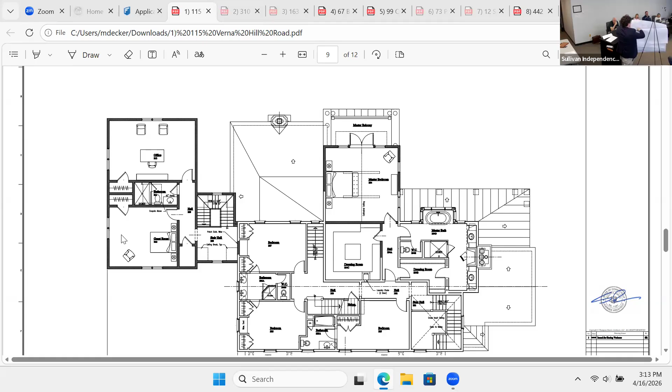So that's the addition there. You're looking at the side addition, or side of the addition right here.

So again, just maintain the character of what's there existing, but just extending to a second bay.

Next, I'll just show you again aerials of the surrounding neighborhood. This is the GIS map. There's 115 Verna Hill Road. And one of the things I tried to point out, and that you could see if you look at the aerial map, is that non-conforming side setbacks are a norm.

That same neighbor at 63 Verna Hill Road that I was talking about, they're only 6 feet from their side property line setback. One important thing, because of that, even after the addition, these neighboring dwellings, 63 Verna Hill Road and my client's dwelling, will still be about 125 feet apart.

So because that's skewed way over to this side, it's well in excess of the side setback standards. The regulations intend for dwellings like that to at least be 60 feet away from each other, 30 feet on one side, 30 feet on the other. This will be more than double that.

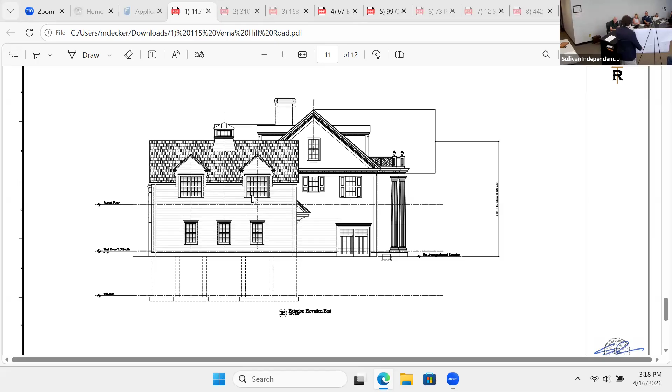So I think I know the answer, but I'm looking at the zoning compliance summary in the survey, and it says the minimum lot frontage is 596 feet along Greenfield Hill Road. But that's not material to the application—it should be 185 feet. And why is it? It's just a simple mistake, but why is it there?

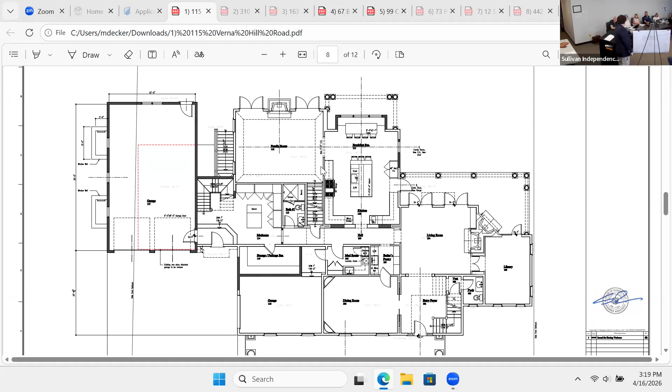Well, I think he's right to put Greenfield Hill Road and put that frontage in there. Let's talk about 596. But you don't have 180—there's nowhere you have 185, which is the issue. It's your hardship and it's why you're here, and it's not anywhere in the summary of dimensions.

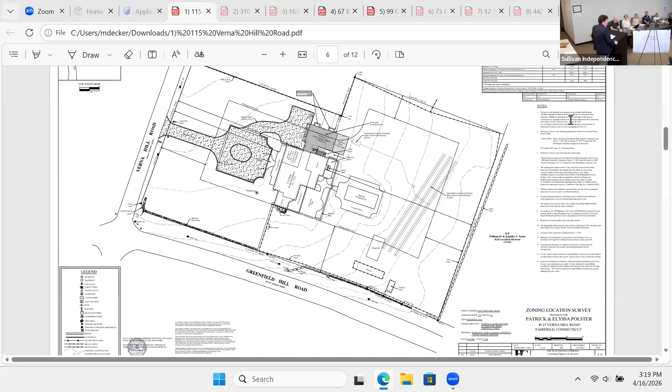Well, I still think he would be required to put that in for the zoning data table, just to show what the total frontage is. And that's why I'm calling it out—specifically because it gets its frontage on Greenfield Hill Road, but the house isn't even oriented that way. It's oriented this way, like it was a regular lot fronting on Verna Hill Road. Right, and that's what the house frontage is on—Verna Hill—and that's 185. It's just very confusing.

Yeah, he could have put an asterisk on it or something, maybe, and put that on there just to show the distinction. Can I speak to that? No, not yet. More questions from the board?

Yes, Mr. Decker, is it typical on a corner lot to just arbitrarily pick the long side to show compliance? What they're showing here is for lot frontage, yes, on a corner lot.

But what they sometimes do—and I was just checking—is have an asterisk down at the bottom to indicate the second street line is X, to identify that, in which case that's more glaring if you had an asterisk there. But by the same token, just looking at the survey, you can see the number is identified on there as being 185. Showing that one of the lines is compliant is uniform through most of what surveyors will put on.

So if it is uniform and compliant, the secondary—well, I was going to say the fact that the secondary street is not compliant with the 200. It's my sense that looking at a grid like this, we should see what the application is about, and we don't see it on here. It's just, take it with you next time.

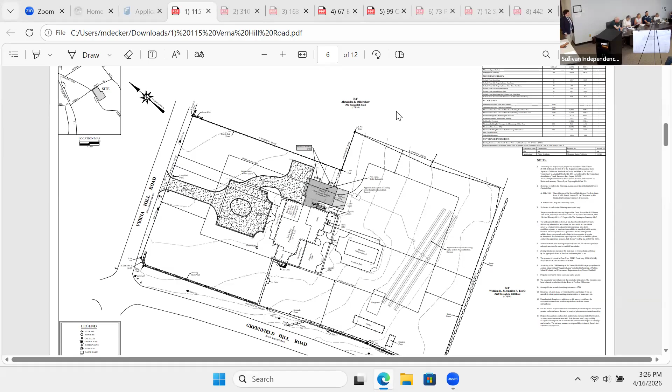All right, so no more questions from the board? Okay, I think I'm good. Okay, thank you very much. Is there anyone in here or online who'd like to speak for this application? No? Is there anyone in here or online who'd like to speak in opposition to this application? No? Okay, we're going to close this application. Thank you.

Okay, I'm going to go on to item number 2, which is 310 Duck Farm Road, map 147, parcel 327. Petition of Angela.

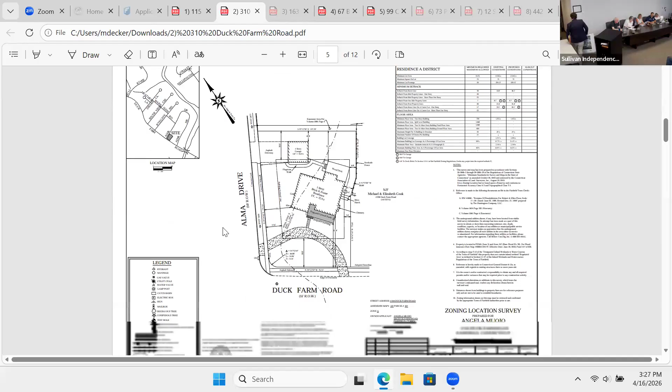Angela Mugo is requesting a variance to the zoning regulations section 3.5.1 to increase the lot coverage from the current 19.7% to 21.4%, for permission to construct a front open porch with stairs.

Hi, I'm Angela Mugo. I live at 310 Duck Farm Road, on the corner of Alma Drive and Duck Farm. I'm in zone A, on a 0.32 acre lot. I'm seeking approval for the addition of a front porch with a proper raising of the entrance into the house, because there is also a large step that goes down.

The original lot had been subdivided years ago, so this is not only on a corner lot, awkwardly tilted, but it's an odd shape as well - this large triangular shape. The previous owners subdivided it and sold it, and in my case there is a large garage in the back, and a deck, and the size of this porch is putting me over the lot allowance.

298 Duck Farm Road; 344 Duck Farm Road, which is across the beginning of Alma Drive - the front of their house is on Duck Farm, but they also have a side driveway as I do, so they're my neighbor there; and then 42 Alma Drive, which is the first house next to me. And I believe you have the survey.

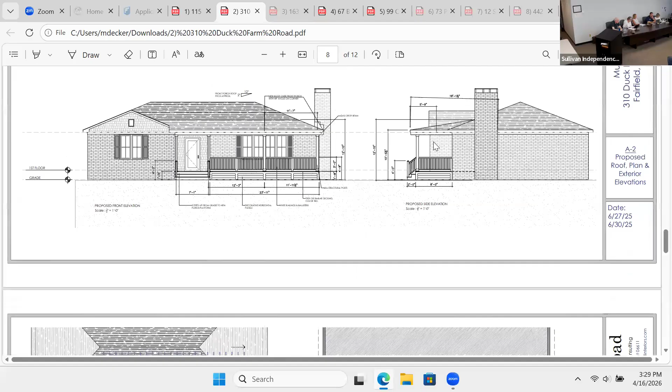Or the updated survey. Excuse me, can you please close the door? Excuse me, I'm so sorry. I have to... I apologize, I'm so sorry.

Those are really the two main hardships of this lot - it's just really, really awkward.

Does the board have any questions? Go ahead.

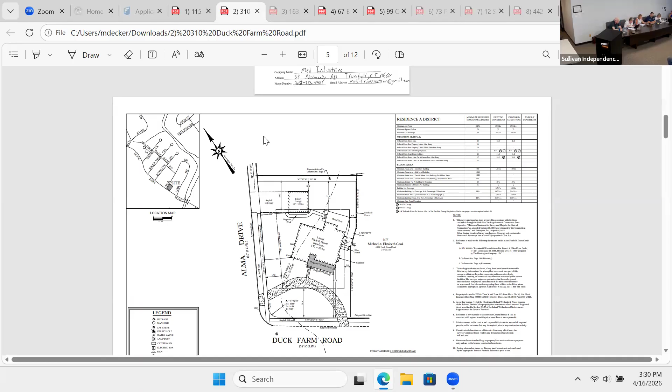Much like the last applicant, I don't see in the zoning summary the 19 feet referred to in the narrative, or I don't see it on the lot coverage. I see it in the chart, but I don't see it on the map. Where exactly is the 19 feet, and why is that being increased, or how is that being increased?

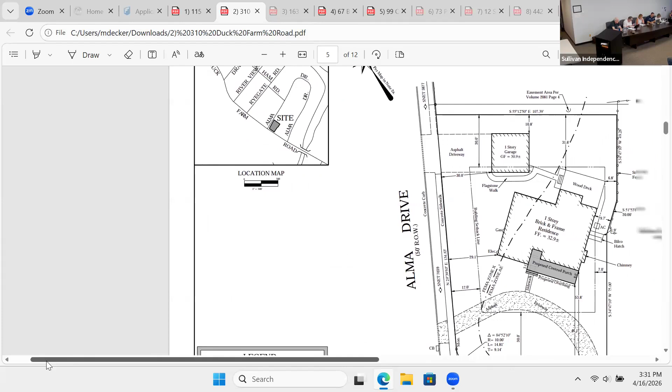I'm sorry, I think I'm misunderstanding. So you talk in the narrative about having - what is it? It's a covered porch that's creating the lot coverage overage. Correct - that's what's on her plan. Matt, can you bring that up? There it is, right there. So that's creating her going over her lot coverage.

Maybe while Joe looks at that, does anyone else have questions on the application? Okay, I see.

Hi, I have a question. So you're talking about the hardship being that the house is not square to the lot? That's part of it, but it's also physically on a very awkward corner lot, and it's also an odd shape.

Right, but you're asking for a coverage variance. So what does the coverage variance have to do with the position of the house on the lot? I mean, I personally don't relate the two. It doesn't have any specific topography, it's a pretty flat front yard.

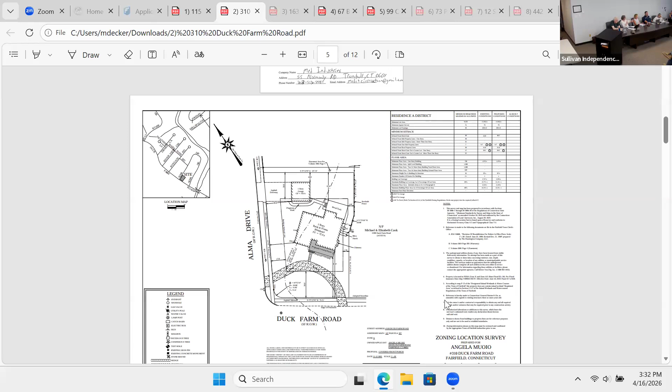The reason I'm asking is, you're asking to go over your lot coverage by a small amount, right? You're also asking for an 8-foot deep porch, which is significant. And if you hypothetically pulled the porch back so it wasn't 8 feet deep, maybe 7 feet deep, would that comply with the regulations? Would you do that? I mean, that absolutely can be done. And would that bring you into conformance? I don't know the exact amount.

My contractor should know, but that absolutely can be done. I wanted the size of it to be where you could at least put a chair on it - it doesn't have to be large. Originally I thought 9 feet was too big, so 8 feet I do think is a decent size, and I 100% could make it smaller to conform with the zoning.

I am on, Angela. Okay, okay. Hi. I am. Hi. Hold on one second. Sure.

So this is the applicant, Matt, speaking to us. And now she's brought on her contractor, so he can now speak for the applicant.

Okay, speaking. Can you, if you're going to speak, I believe you're Vincent, right? Correct. Can you state your name and address, please? Vincent Fumara, 55 Normandy Road, Trumbull, Connecticut.

Please proceed. We are at about 192 square feet. It's 24 by 8 right now, and I know we're just a touch over. I also do work on Alma, working with their neighbors, and I showed them the plans. My personal, humble opinion is that I truly believe it does conform to the neighborhood.

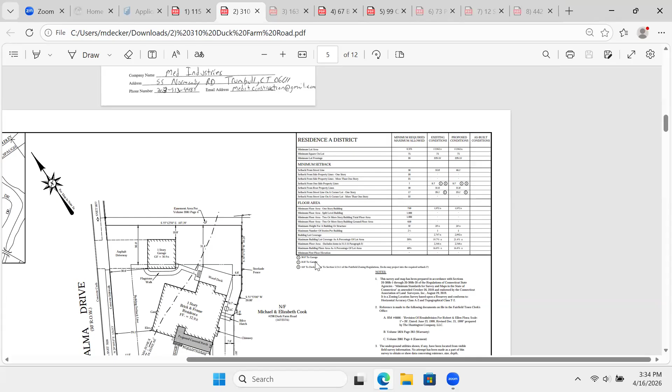Can I interrupt? We're not asking you to do anything. I'm just giving a hypothetical; we can't tell you what to do. Got it, no, I understand. We're not directing or suggesting you must do any of these things. You're only here because you're asking us for a variance on your lot coverage. If you created a plan that worked within your lot coverage, you wouldn't need to come to us, you wouldn't need to come back here. You would just work with the building department. You would conform and wouldn't need to be here.

Okay, any other questions for this application from the board? Sorry, I'm just having a little trouble looking at something. So we've established there is no pre-existing nonconformity on this lot. Well, other than— not for lot coverage, I mean. It doesn't matter whether it's lot coverage or not. If there's a pre-existing nonconformity on the lot, no matter what they do to the lot, they... You can ask questions if you have questions. So if there's a pre-existing nonconformity on this lot, and they want to do anything to the lot, they would have to come here anyway, whether it's directly affected by the build or not. Is that my understanding correct?

Not necessarily. Anybody can do construction to their property that could make the addition compliant or not. It's just a matter of how it fits on the property and how it fits on the house. Every parcel's different—some are conforming, some are not. We heard that on the past application, we heard it on this one; they're relevant, but it's just a matter of what you, as the board, feel is in line with what comes before you and what you hear.

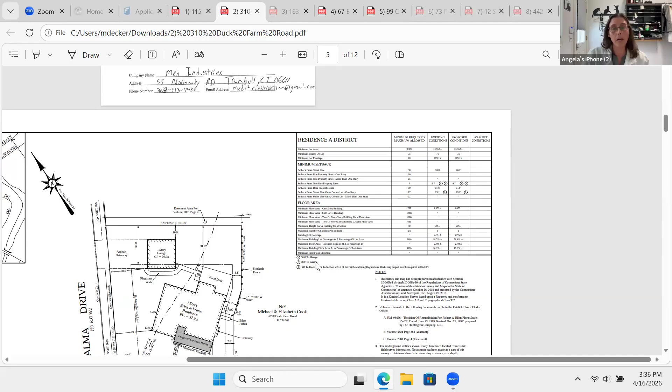I'm not seeing a nonconformity in the existing circumstances. Is that correct? I don't believe there are any. Okay, that's what I thought. I'm just saying it was subdivided and it's awkward, that's all. Okay, all right, thank you very much—that hardship. Thank you so much. Sorry for my interruption. No, don't worry about it.

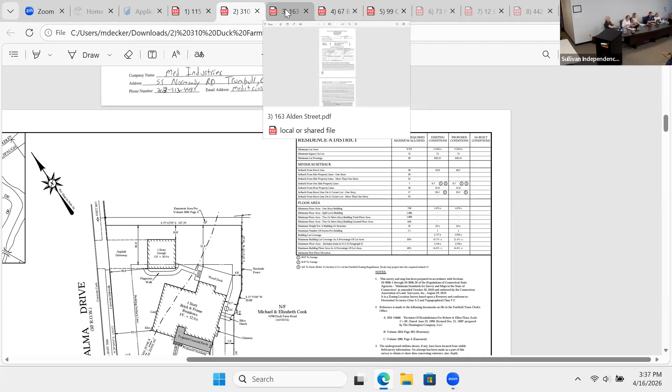Okay, is there anyone here who'd like to speak for this application? Is there anyone here who'd like to speak in opposition of this application? We're going to close this application. Okay, thank you, thank you.

Our next item is number 3, 163 Alden Street, map 182, parcel 495, petition of Richard John Meehan for a variance to zoning regulations section 3.4.1 to reduce the street line setback from 20 feet, currently 12.8, proposing 14.2. And section 3.4.2 to reduce the street line setback for an unenclosed porch from 12 feet, currently 9.6 feet, proposing 4.7. And section 3.5.1 to increase the total floor area from 50%, currently 29.5, proposing 61.3. Permission to construct a new FEMA-compliant 2.5-story single-family dwelling with a front and rear porch and stairs, premises B zone.

Does the applicant—he's online. Okay, you're muted, I think. He's on, can you hear me? Okay, so name and address? Hi, yes, Richard Meehan, 163 Alden Street, Fairfield, Connecticut. Please go ahead and explain your application to us.

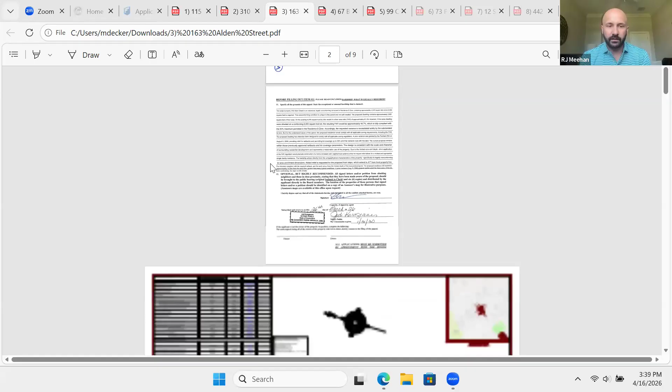Okay, great. So again, I'm Richard Meehan, the applicant for 163 Alden Street. We're proposing to demolish the existing structure and construct a new FEMA-compliant 2.5-story single-family home at 2,681 square feet. The design is consistent with the scale and character of the homes on Alden Street; it fits squarely within the established pattern of the neighborhood. We have 3 items as referenced before on the docket. First, the main structure setback, which is largely a continuation of the variance this board granted back in 2006, which runs with the land. Our proposal at 14 feet 2 inches is actually more conforming than the 10.26 feet previously approved and the approximately 12-foot existing conditions. The 2 substantive requests are on the FAR and the front steps.

Both arise from the same hardship: this lot is legally non-conforming at 4,376 square feet, which is 27% below the Zone B minimum of 6,000 square feet, and the lot itself is only 58 feet wide. On a conforming lot, this exact house would have a 44.7% FAR and need no variance at all. The front stairs are a direct consequence of FEMA flood elevation requirements, not a design choice.

I will add one personal note. I purchased this house in 2020 as my first home. My family has grown here. My wife teaches at Mill Hill, and my family firm relocated to Fairfield last year. So we're not here as developers. We're here as neighbors who want to stay and invest in this community for the long term.

The hardship in this case is singular, pre-existing, and already established. In this board's own record, 163 Alden Street is a legally non-conforming lot of 4,376 square feet in the Zone B district that requires 6,000 square feet. The deficit, as I mentioned before, at 27%, equates to 1,624 square feet below the minimum. Under Connecticut General Statute, a variance is warranted where unique physical conditions of the property cause strict application of the regulations to produce hardship disproportionate to the zone's purpose, and where that condition was not self-created. All those elements are satisfied here.

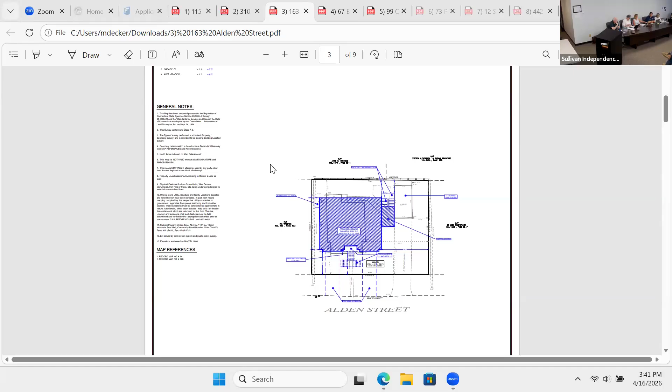The 50% FAR standard in Zone B was calibrated for a 6,000 square foot lot. Applied to a 4,376 square foot lot, it imposes a materially lower ceiling that has nothing to do with the size or scale of the proposed structure. The proposed house is, as I mentioned, 2,681 square feet, a standard 4-bedroom single-family home with conventional room sizes. On a conforming 6,000 square foot lot, this exact house produces a 44.7% FAR, fully within the 50% limit, and no variance would be needed.

The 493 square feet above the FAR threshold is not the product of overbuilding. It is the direct mathematical consequence of a 1,624 square foot lot deficit. I'm not asking the board to approve an oversized house. I'm asking to recognize that this is an undersized lot. This undersized lot makes an otherwise compliant house technically non-compliant through no fault of the applicant.

Regarding the front stairs, again, the 2006 variance granted relief for the front stairs on the same parcel, reducing the minimum street setback line from 20 feet to 10.26 feet. The board accepted that the flood zone conditions and lot constraints on this parcel warranted that relief. Today, we are proposing 4.7 feet, a greater encroachment than what was previously granted.

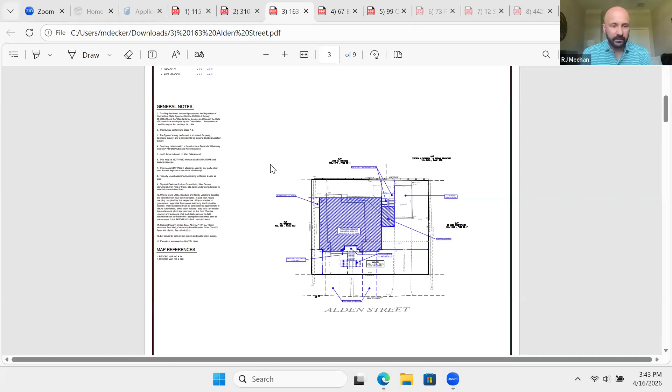In Zone B, FAR and setback standards exist to manage neighborhood scale, density, and massing. The proposed 2,681 square foot, 2.5 story single family home is consistent with that purpose and with the character of the street. The variance process exists precisely for situations where pre-existing lot conditions, which the owner did not create, make strict compliance impossible, while the proposed use remains fully consistent with the zone's intent. And this is that situation.

Okay. All right, thank you. Does the board have questions for this applicant?

I do. Hi. So you have a house there now that you've been living in? Yes. So there's nothing wrong with the site with the house you have now? There's no hardship attributed to the site with the house that you have on there now? It's just the house you want to build, all of a sudden there's a hardship. Is that correct?

That's correct. The house that I have there now is a non-compliant home. It was built in 1930. It's an older cape. For us to increase the size of our house, which is our intent because we are trying to grow and expand our family, we would not be able to reasonably do so with the constraints due to the FEMA requirements.

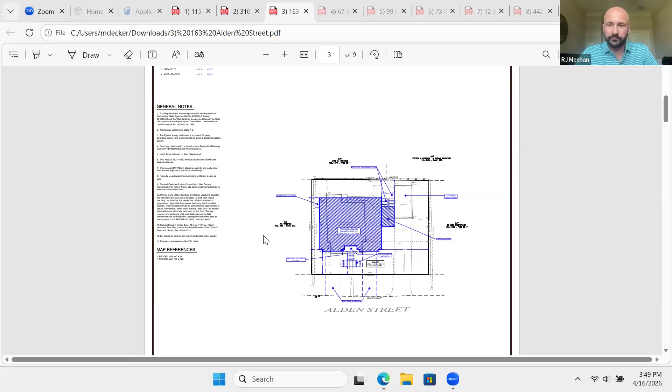My name is Carl Poulsen, 5 Hollis Street, Fairfield. Okay, and I just want to make sure you can hear him, Mr. Meehan? Yes, okay. Right now we're just going to listen to him, but after he speaks, if you'd like to address what he said, you're welcome to do that.

Okay, please. What is the definition of a hardship? Well, it's a legal term, and it has to go with the land. You have to go with what? It has to go with the land. With the land? With the land. It's only about the property, it has nothing to do with anything personal, any needs you have.

So it would be the size of the land? Yep, topography. If you have a lot that fell down a lot in the back, if you're on a corner lot, there's a lot of hardships. So he was claiming that it was a hardship situation in this case? Yes, Mr. Meehan is telling us that he has an undersized lot, a pre-existing non-conforming lot, which it is.

Now, I have to disagree with the character of the neighborhood. The character of the neighborhood is changing because of these enormous homes that are going up, which is really ruining the character of the neighborhood.

I live on Hollis Street, and they're 1.5-story homes, and the whole area is being surrounded by these enormous homes. You're blocking out the sunlight, the sky, the trees, and you can't even put a price on that. Everything is about how much the home is worth, but what about your mental health, where in so many instances these people are surrounded by these big homes and they don't have a view of the sky anymore. The sun's being blocked out in the morning, trees are being cut down, and I think that has value that's really not being taken into consideration in most instances.

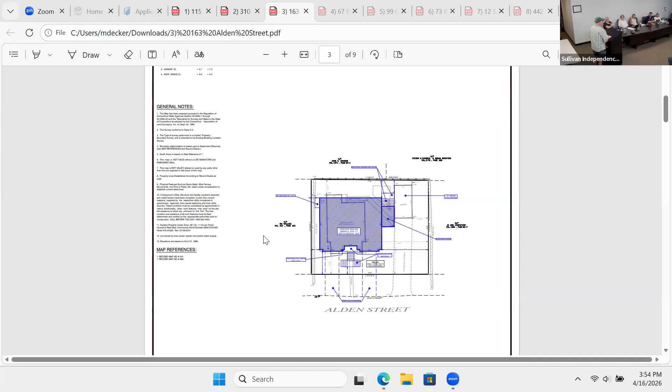Okay, so anyhow, I really would prefer not to see this home built. It's going to be a knockdown, you're going to build a big home, and so I would object to this being done.

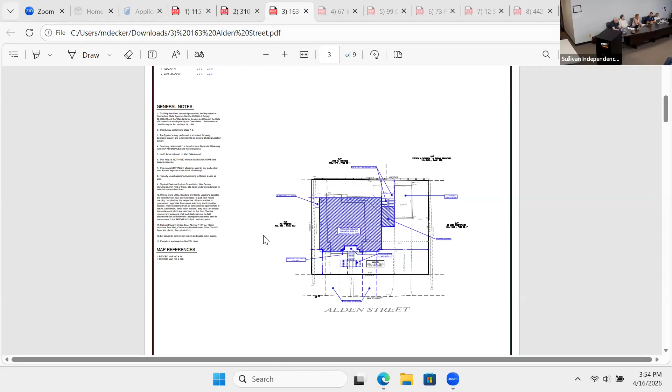Thank you for coming and telling us that. Mr. Meehan, would you like to address any of the comments made? Nothing outside of the fact that I believe it's part of my materials submitted—I have spoken with my neighbors who signed the petition and showed them the plans for this. There was only one neighbor who just didn't answer.

Seeing no one else wants to speak in opposition to this application, we are going to close this application. Thank you.

We are moving on to item number 4: 67 Brookview Avenue, map 31, parcel 172, petition of Tom and Rebecca Little for a variance of the zoning regulations, section 3.5.1, to increase the lot coverage from 20%, currently 20.6, proposing 24.2. Permission to construct a new 1- and 2-story addition and a detached shed, premises A zone.

Members of the Zoning Board of Appeals.

My name is Rebecca Little, and I live at 67 Brookview Avenue with my husband Tom and our 2 children. I am here today to ask for zoning relief for our home. Our architect, Alyssa Kent, has been assisting us with the design and zoning process.

We are seeking a variance from section 3.5 coverage and bulk standards, specifically for maximum lot coverage where 20% is permitted. The existing lot coverage is approximately 20.6%, and the proposed project would result in a total lot coverage of approximately 24.2%. The need for this variance arises from the below property hardships.

Undersized lot conditions: the property is undersized relative to the requirements of the A zone, including both frontage and overall lot area. These constraints limit the ability to expand the home in a manner that fully complies with zoning while still meeting reasonable residential needs.

The second is existing nonconformity. The property already exceeds the allowable lot coverage slightly at 20.6%. Making an addition, no matter how modest, would trigger the need for zoning relief. This is a pre-existing condition not created by the current homeowners.

Importantly, we are seeking to remain in our established home and neighborhood where we have built strong personal and community ties, rather than relocating. The proposal reflects a reasonable and measured effort to adapt our home to meet these needs.

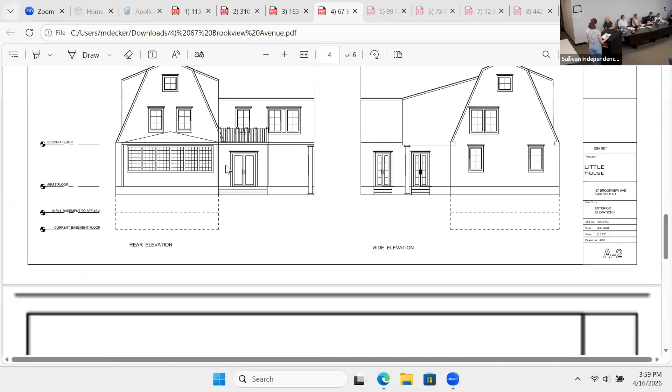Just an email. So it's an email from Robert Cooper, okay, who's dead. Yes, we are aware of that.

Did you know that he signed his name and it wasn't him? I was not present for that. Even as executor? I do not know.

It's a sensitive situation that I really try to stay out of, what is going on with my neighbors.

Okay. Okay. And my husband is on, and he can touch on that further if needed.

Which one, is she—he's Tom, my name is Tom Little. Okay, just name and address? Yep, Tom Little, 67 Brookview Avenue.

Do you... yeah, I don't really, we, like my wife said, we don't really know the situation next door. We kind of stay out of it. Last I heard from them, it's in probate at this point. Not really sure anything more than that.

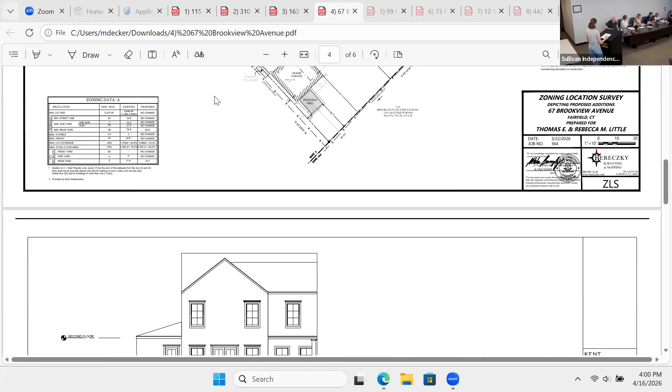Tom, do you know? Yep. We're looking at putting in an 8-foot by 10-foot shed. That's because as part of this project, we want to bring the home into FEMA flood compliance, so we'd end up losing our entire basement. So we're asking for a small, modest shed just to have some additional storage.

You have a 2-car garage as well, right? Yes. That currently acts as our workspace outside of the home. Right, because we both work from home.

Okay, any other questions to the applicants from the board? Okay, thank you very much. Is there anyone here who'd like to speak in favor of this application? Is there anyone here who'd like to speak in opposition to this application? Okay, we are going to close the application.

Thank you. Okay, we're going to move on to number 5, which is 99 Quaker Lane, map 128, parcel 310, petition of Jeff and Rachel Anderson for a variance to the zoning regulations, section 3.4.1, to reduce the side setback from 7 feet, currently 13.2, proposing 5.9; and section 3.5.1, to increase the lot coverage from 20%, currently 15.6, proposing 22.8, permission to construct a rear addition for a future ADU.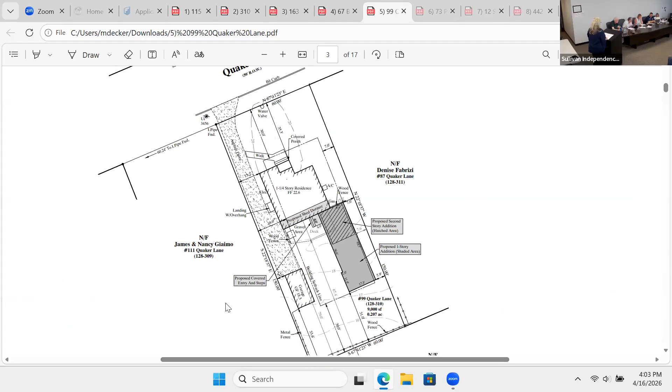We're here today seeking variance approval so that we can build an addition to our small cape for my 86-year-old father. My mom passed away last August.

As you can imagine, that has changed a lot for my dad in the last 8 months. Anyway, as a family, we have decided that having him live with us is the best scenario, certainly from a social and emotional support perspective, but also from a very practical perspective. Staying in his home without my mother's pension contributions has become financially impossible for him. So this addition will allow him to age in place, to stay in the town that he has lived in for over 55 years. With this addition, he can remain relatively independent and have the support from our family going forward. Our architect is out of town, but she provided a letter which is shared in the online file.

She's outlined the hardships that we are facing with regard to our pre-existing undersized lot, as well as the design considerations for my elderly father. I can read her letter, or I can just highlight some of her points. I'm not sure what's preferred. Probably highlighting is great, since you have it, right? Yes. Okay, so our architect and friend is Alyssa Kent, and she writes on behalf of us.

The applicants are seeking relief from the following zoning requirements: the one side setback with the minimum requirement of 7 feet and a proposed setback of 5.9 feet. The sum of side setbacks, the minimum required is 25 feet and the proposal is 19.1 feet. And maximum lot coverage: the permitted is 20%, and the proposal is 22.8%.

The need for these variances arises from unique physical conditions and hardships of our property. We have an undersized lot frontage - we have 60 feet, and the regulation is 75. We also have an undersized total lot area, and existing non-conforming conditions.

The existing house is slightly skewed on the lot rather than aligned with the property. So the proposed addition follows the geometry of the existing building, resulting in a gradual extension into the setback, rather than introducing a new or abrupt nonconformity.

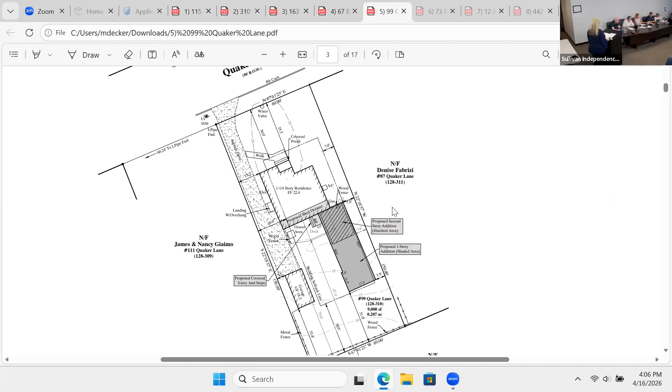She also notes that the proposed first floor addition is intended to create a private space for my father, which I've spoken about. His mobility and accessibility needs were the primary drivers of the design. The space has been carefully planned to be entirely on one level, minimizing or eliminating steps to allow for his independent access. These requirements significantly limited vertical design options and have necessitated a ground level footprint. We've made every effort to reduce the size of the addition to the minimum necessary to accommodate these accessibility needs and to maintain a functional and dignified living space for my father.

The placement of the first floor addition was challenging due to the previously mentioned hardships, but also due to the interior layout of the connecting structure. The back of the existing house contains two bedrooms and a bathroom, and so we are proposing to convert one of those bedrooms to a dining room and to connect to my dad's space. The placement of the addition was constrained by where we could add doorways and such.

Those are her major points. Maybe I could just read her last two sentences, if you don't mind. In summary, the requested variances are not self-created, but instead arise from the combination of an undersized lot, existing structural constraints, and the legitimate need to provide accessible housing for an elderly family member. The relief requested is the minimum necessary to achieve these goals, and the proposal will not be detrimental to the neighborhood nor inconsistent with the intent of the zoning bylaws. Sincerely, Alyssa Kent.

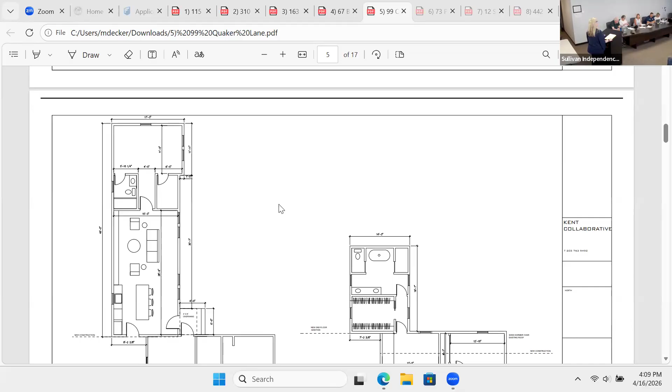Yes, this is Michael Fabrizi. Can you hear me? Yeah, Michael, just name and address. Michael Fabrizi, 87 Quaker Lane. We're Rachel's neighbors to the east side of the property. Yeah, go ahead.

I wasn't sure that I was going to make it in person, and since I'm remote, I prepared a statement. I believe all the board members have it. I figured I would walk through that as the talking points for my concerns with this, and then add some additional commentary to Rachel's comments about the architect's comments.

So I just want everybody to know that we respect Rachel's application. We are her neighbors for 21 years. We've been in Fairfield for 35 years, living at 87 Quaker Lane. I fully understand the challenges working on a non-conforming lot and the design difficulties that may be required when adding additions, but nevertheless there are some concerns with the addition that I'd like to bring up to the board.

From the objective side, there's some zoning and compliance issues, and I'm not sure if omissions were intentional, but my understanding of the regulations is there are some additional requirements for accessory apartments. This is being applied for as an accessory dwelling unit. I don't think the regulations define accessory dwelling units, although I understand the intended purpose of this being for her dad. And then there's also issues regarding the character and architectural design that potentially change or don't conform to the character of the neighborhood. So I'd just like to run through some of the things, and you can follow along maybe in the write-up.

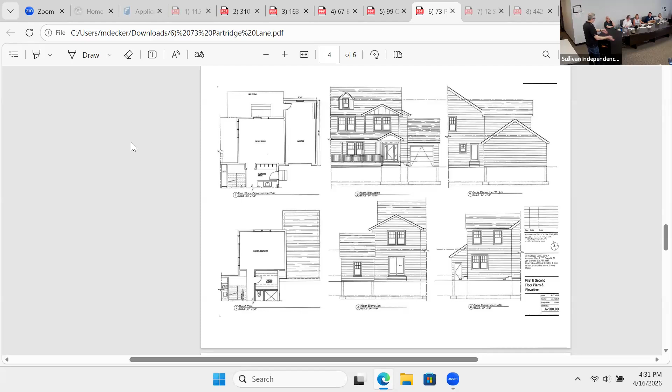In terms of design, consistent with the overall character of the neighborhood, all the abutting neighbors have approved and are supportive of the proposal. The variance is to request additional lot coverage, going up to 2.7% above 20%, largely due to the constraints of the easement. So were we to look at other options, we could reduce or eliminate the size of the front porch, and normally would be able to do a detached structure on the side of the house for garage, but that's not an option because of the easement. So this is a kind of workaround or an attempt to make the best use of space given those constraints.

Questions from the board? Joe? Sorry. It's all right. How large is the garage, existing? How many square feet is the proposed addition? It would be about 250 square feet, approximately 11 feet by 24.

Go ahead, Jane. So if the easement wasn't there, would you have made that proposed garage addition wider? We would probably do it detached. It would be wider, more like a standard two-car garage. So those are all just hypothetical, maybe we would have done that. So, because we can really only look at... Yes. In fact, the original plan when the prior owner did the renovation was to have a detached garage. They changed that as a result of not being able to build anything over that part of the property.

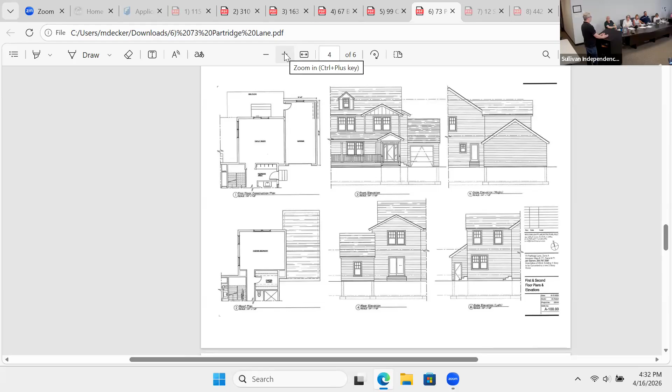Okay, any other questions?

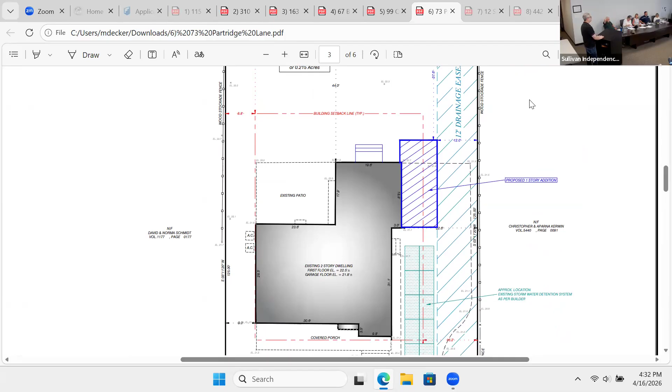Is there anyone here who wishes to speak in favor of this application? Is there anyone here who'd like to speak in opposition? No? Okay, we're going to close this application. Thank you very much.

Hi, my name is Jude Johnson. I live at 298 Patrona Drive, right around the corner. My partner Tarek and I renovate in the area, so I stay close to home if I see something that needs development. I'll just read some of my points. 12 Sugar Plum is an existing non-conforming structure.

It was already 27.5, so it wasn't meeting the front setback to begin with. Our intention was to set it back on the top, so we did a second floor just over the garage and a living space, but the framers, as explained to me, were trying to align it and still left, based on the framing, about 6 inches exposed still into the front setback.

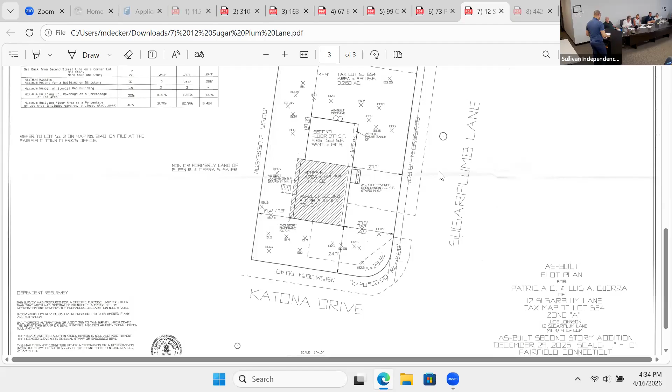When we applied for a permit to add the second floor, the intent was to correct this by setting back the second floor to meet the zoning minimum front setback. Due to alignment issues with the existing structure, our framers unfortunately framed the second floor approximately 6 inches still in the setback. The encroachment, in my opinion, is extremely minimal and does not materially change the footprint, scale, or visual impact of the home in the neighborhood.

The property is also located on a corner lot, which creates additional setback constraints compared to interior parcels and limits the flexibility of the building envelope. Prior to renovation, the house had been vacant and in a state of significant neglect, with overgrown trees and deferred maintenance. Through this project, the property has been restored and improved, contributing positively to the surrounding area. Correcting the 6-inch deviation will require substantial demolition, creating unnecessary hardship without providing much material benefit.

Additionally, we have obtained signatures from all of the neighbors. Obviously, I live in the neighborhood, and they were quite happy to see this home get renovated and brought up to standard. They fully support the variance and the work performed. For these reasons, we respectfully request approval of the variance.

Okay, thank you. So, questions from the board? Presumably you got a building permit, no problem with everything that was proposed. Yes, correct. And now it's come up on the survey, or how did you decide? On the survey, yeah, as-built. Yes, on the as-built. But when you look at how it framed, it's not like it's jutting out. So when they framed it, you could see that when they aligned it, it's still trying to keep it square. It's still protruded a little bit, yeah.

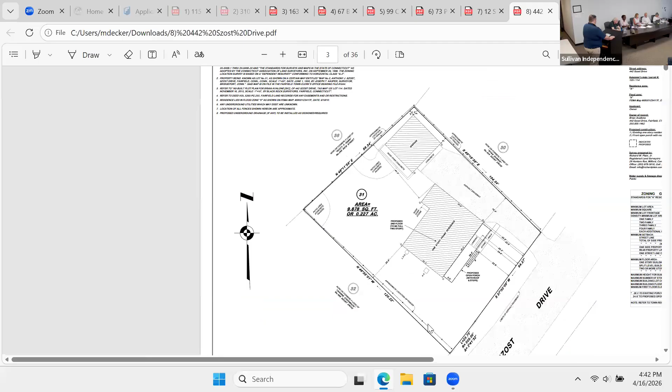Good afternoon, board. Thank you for your time and our wonderful alternates for sitting for us. Anytime a member of this board comes up, it can certainly present some awkward circumstances. However, I believe our application is fairly straightforward. My name is Brian Avallone, I am at 442 Szost Drive, and I am the joint property owner. No one's perfect, guys, forget who I am.

At this point, we have a fairly straightforward single nonconformity for the hardship, which is the pre-existing 0.3% overage in the lot coverage. We also have a topographical hardship wherein the front of our lot slopes down rather significantly. What we're seeking to do is add my wife's dream porch. It is very modest, adds significant character to the home. In presenting the design to the neighborhood, the first thing everyone pointed out was, what a beautiful porch. It will provide shade when necessary and cover for when our kids are playing outside.

It will significantly enhance the aesthetic of the home from the front. The house itself, in its future condition, is in compliance and within what the rest of the neighborhood looks like now and the construction that has been existing.

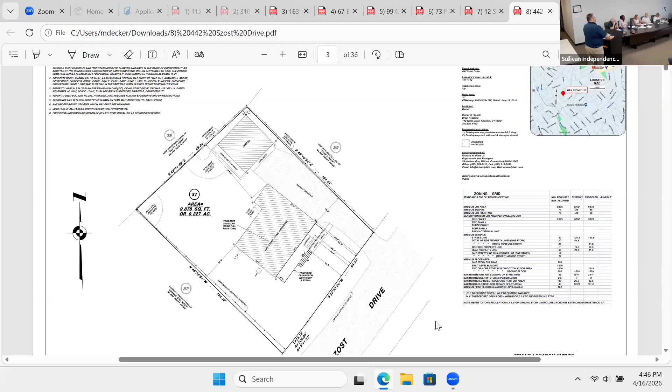Matt, if you could just scroll down and show the existing homes within the area. There's one I did not take a picture of that is significantly larger. We specifically designed our house not to fall within that imposing style structure. That house has been there for a while.

Just scroll through slowly. The primary difference with our deck is that, because of the topography, it'll be raised up slightly and fenced in for safety.

Okay, questions from the board? Does your home currently have an overhang over the front door? It does not, no. So adding the porch with an overhang would protect your front door and possibly wooden structures from the weather? Yes, very much so.

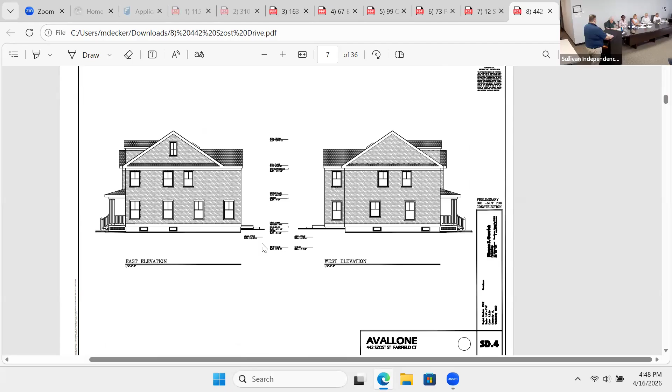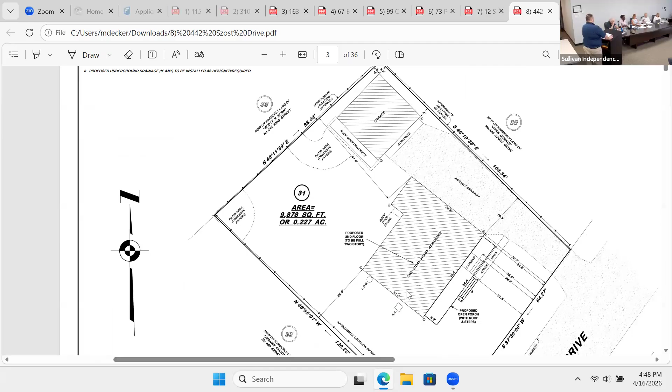I'm not exactly sure how to go forward with this, but let me share two things. Interestingly, Brian, your application is 36 pages long and includes some of the guidance that comes with all applications on our website. I'll give you a copy and pass it on so you can have an opportunity to comment.

At the bottom of the page, section C: variances to be sparingly granted. The power to grant a variance should be exercised sparingly. The obvious reason is that unless great caution is used and variances are granted only in proper cases, the whole fabric of town and citywide zoning will be worn through in spots and raveled at the edges until its purpose in protecting property values and securing the orderly development of the communities is undone.

The granting of a variance must be reserved for those situations involving exceptional or unusual circumstances. That is from the Connecticut Federation of Planning and Zoning Agencies and its guidance to applicants in making applications.

And in our training for this, we have been directed by CLEAR, the UConn Center for Land Use, Education, and Research, and this book by Michael Zizka, a copy of which I'll give you. In it, he cites Moon versus Zoning Board of Appeals: the granting of a variance must be reserved for unusual or exceptional circumstances. An applicant for a variance must show that, because of some peculiar characteristic of his property, the strict application of the zoning regulation produces an unusual hardship as opposed to the general impact which the regulation has on other properties in the zone.

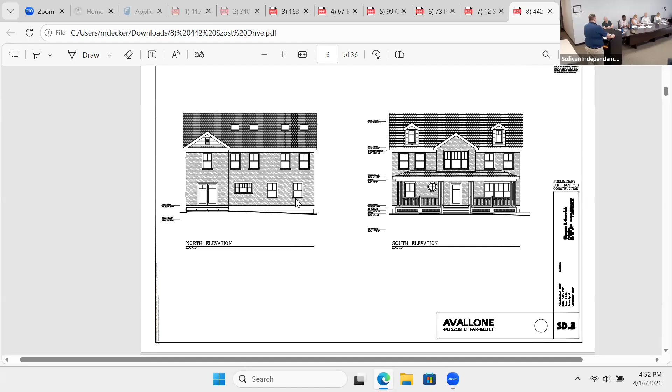The remainder of the argument I would say is that boards such as this exist in order to utilize reason and protect against extraneous, imposing buildings that would significantly be contrary to either the characteristics of a neighborhood or the comprehensive zoning code. I believe what is being presented here is a nominal request that in no way infringes on or places at risk the comprehensive zoning plan or any significant fabric of a neighborhood or the town itself. I don't believe there is any wearing thin of or risk to the comprehensive zoning plan of the town in granting a 2.2% coverage variance for a porch.

So you're saying if the property were flatter, the porch could be a patio, not included in the coverage ratio, and therefore that's your hardship? We would have better remedies if the topography were other than this. Okay, but we don't have any evidence of this topography. Like I said, we all have computers, we can Google Earth it. But that needed to be submitted with the application.

Okay, any other questions from the board? No? Joe? No. Okay, thank you, Brian. Is there anyone here who would like to speak in favor of this application? Anyone here who would like to speak in opposition? Okay, we're going to close this application, and we're also going to close the public hearing.

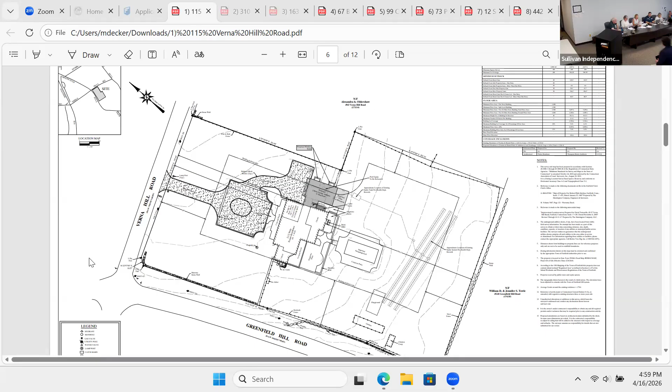Okay, our next application to consider is 310 Duck Farm. They're looking to construct a front open porch with stairs. Can I have a motion to approve? So moved, Brian, and a second. Jane seconds. Discussion.

I cannot find a hardship on this property. We can't either, and we know that there are options. We're not going to deprive her of building a porch, it just may not be this porch. Anyone have any other thoughts on this application?

This is another one where there's no deleterious effect. I understand that she can make it smaller and do it, I believe, as of right, I think is what we had said, right? She can make it shallower and then build it as of right.

Well, no, I think we're looking for lot coverage. So I think they were talking about decreasing the deck so that the porch could then be built as of right, without needing a variance, within the regulations. It's clarifying the term of art, 'as of right.'

That application was not... I'm sorry, I should have been a no, I misvoted. Okay, you just made a mistake. Yeah. Okay, so for the record, I think we're okay if Tara notes that Joe just misspoke and he was also a no. Okay, our next is 163 Alden Street.

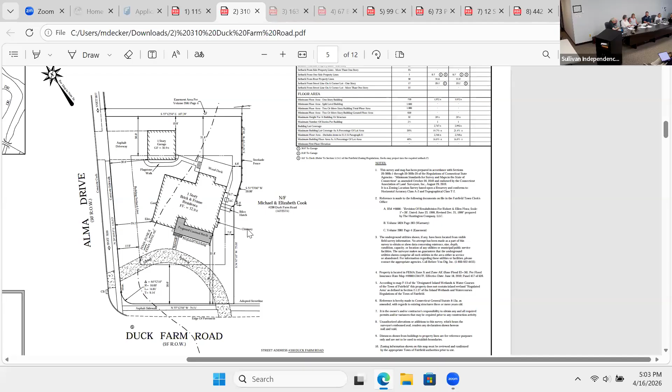I'm focusing on the FAR, which is the bulk. Bulk has to do with the proportion of the proposed structure to the size of the lot. I looked it up, FAR regulations date back 100 years because people were not happy with giant properties overshadowing the street and overshadowing the neighbors.

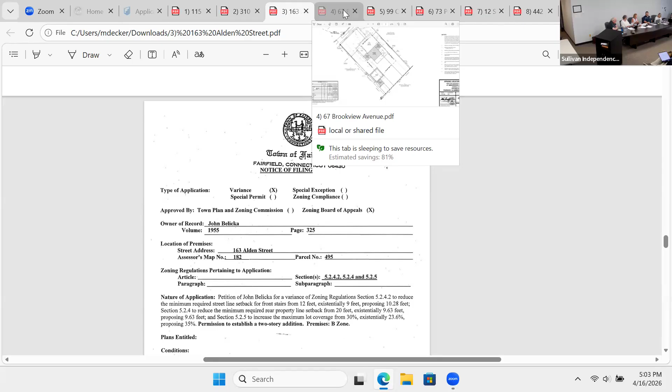So this one, I think, is... if this application came to us and said we want to put a second story on, and lift it up because they do have a non-conforming lot, I think all of us would say yes to that. But I think what we're fearful of is they've gone so far over.

If there's no more discussion, we will vote. Rachel? Yes. Brian? No. Joe? No. Jane? No. And I'm also a no. That application was not approved.

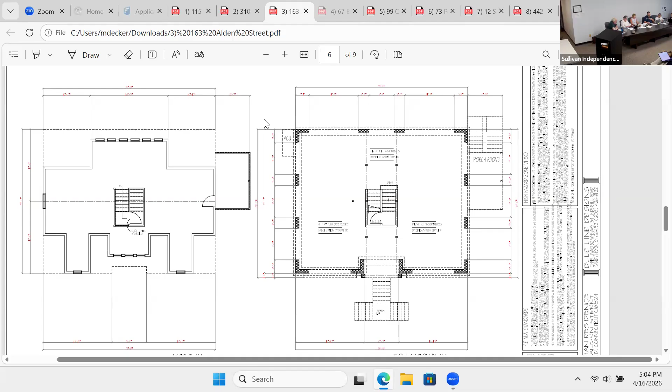Okay, we are on to 67 Brookview Avenue. They are looking to add a shed and additions to an undersized lot. Can I have a motion to approve? So moved. Brian motions and Jane seconds.

Yes. Did you, or yes, did I, yes, make it? I've already seconded. Sorry, I'll second. Okay, discussion.

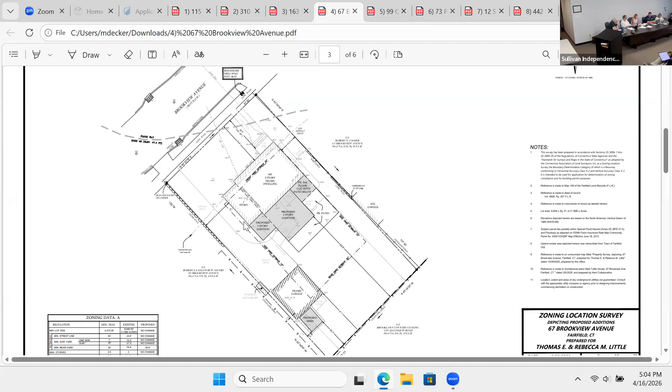I have no problem with the addition, but I have to point out, and this came up last month, adding a shed because you've lost your basement, that's not a hardship we need to address. It's like, get rid of your stuff. Last month's basement situation was different than this one. Last month, it was an accessibility issue that really was not a property issue. This one, they lose it because of FEMA, and that's a whole other matter.

Last month was also FEMA? Yeah. So the issue here is, last month we had two sheds on the agenda. One was FEMA and one was not. As we're talking about this, I don't think it's like, oh yeah, they need to put their stuff somewhere, so we have to grant them a variance for that. That's a separate issue, not a hardship.

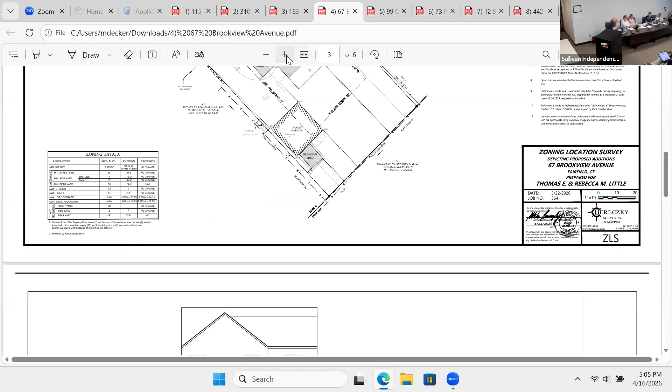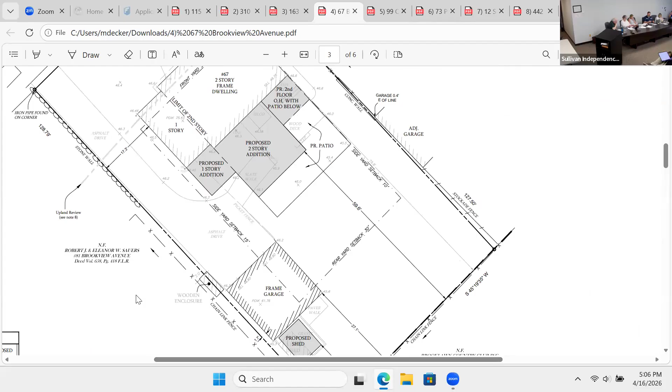I don't disagree with you. However, I don't think denying it because they're asking for a shed... I didn't say I'm going to deny it. No, I know. I'm just saying, as much as it's not a reason for granting, it's also not a reason for denying it. I think it's a fine use of the property. It's not impinging on anything, not causing anybody any harm, question, or concern. I put this on the record: there was no argument from anyone anywhere saying we don't want it. Anyway, there are legitimate hardships attached to this property.

Regardless, are we ready to vote? Rachel? Yes. Brian? Yes. Jeff? Yes. Jane? Yes. And I'm also a yes, that variance is granted unanimously. Giving Tara a look so she hears me.

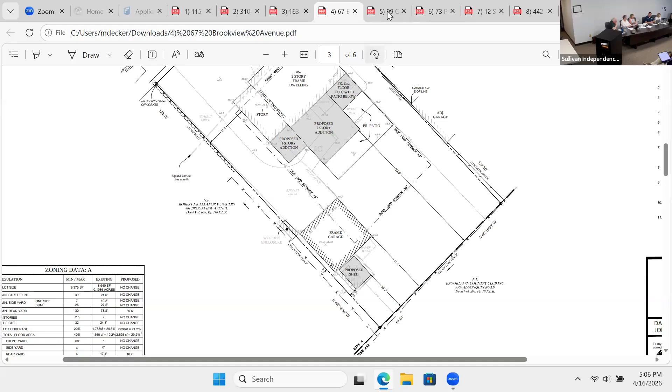Okay, number six, we're going to 73 Partridge Lane. They're looking to construct a one-story, one-car... Quaker Lane, aren't we? We're on 5 Quaker Lane. Oh, I'm sorry, 99 Quaker Lane. This is, they're looking to put an addition on their home. Can I have a motion to approve?

So moved, and a second. Okay, discussion. I'll do my usual spiel, but I think it was designed thoughtfully. I don't think it was designed to be outside of the character of the neighborhood or the comprehensive zoning plan. The hardships are real, it is a pre-existing non-conforming lot, it's undersized, the shape is a little funky, and it's an addition.

Notwithstanding Mr. Fabrizi's—I don't want to say well-meaning, and I don't want to say well-intentioned, but—misunderstandings of our code, I think this is an addition, and I think it's a reasonable addition. I think it's good for the house.

Can I add something? Of course, add away. We cannot make aesthetic judgments on these projects. We're only here to talk about zoning issues. So to say something looks good or fits the neighborhood, that's sort of irrelevant. That's all. And also, as much as everyone cares, it doesn't matter that it's for her dad.

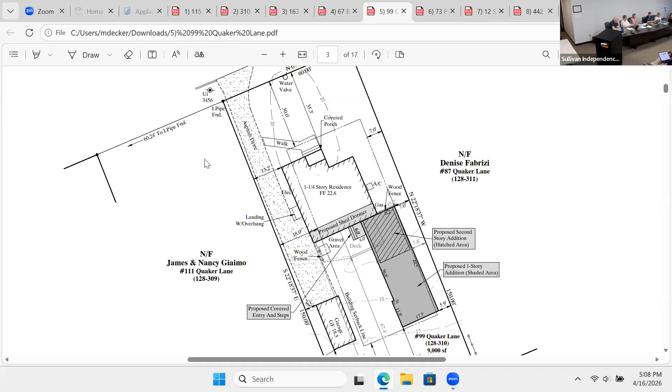Now we're going to do 73 Partridge Lane, looking for a garage. Motion to approve. So moved. Brian, and a second. Second.

Rachel wanted to get in there. Discussion: the easement exists as a recognized hardship in our deliberations, and that is legitimate. Where they put it, I think, is the only place they could put it. When you have an easement like this, it should add to your lot coverage, but it doesn't calculate like that. If they could add this back in, they wouldn't need this application, because they have unusable pieces on their property. Any other comments or questions on 73?

The only other thing is I took seriously their representation that they could have put a freestanding, unattached garage, and then it wouldn't figure into some of the calculations they need relief from. Except it would have to be on top of the easement. That's why the easement comes in. I took their arguments to heart that they couldn't do this. Okay, we are ready to vote on 73 Partridge Lane.

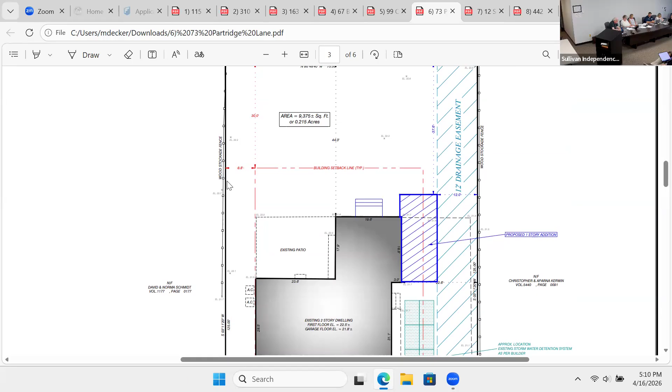Rachel? I say yes. Brian? Yes. Jeff? Yes. Jane? Yes. And I'm a yes. Unanimous approval of the variance.

Okay, we are going on to number 7, which is 12 Sugar Plum Lane. This is an as-built. I have a motion to approve. So moved, and a second. Jane seconds. Okay, discussion.

I think they would have come before us ahead of the build, had they realized this was a framing issue. The fear is one day we're going to say no. But we won't, we judge every application on its own merit. I totally agree, we don't compare it to anything else. But one day... well, we'll see.

I just want to add that I've had my own experience with framers. We were putting an addition on our house years ago, and my wife went home for lunch and said, 'It's backwards.' They said, 'No it isn't.' She said, 'Yes it is, let me show you the plans.' And they said, 'Oh yeah, it is backwards.' It happens.

Okay, ready to vote. Rachel? Yes. Brian? Yes. Jeff? Yes. Jane? Yes. And I'm also a yes. This application is unanimously approved.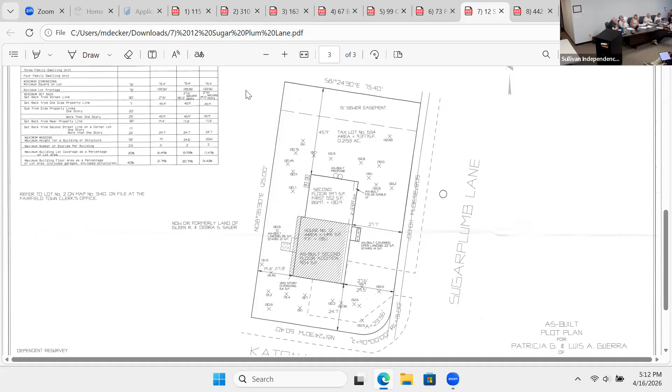I take Brian's representation about the topography. I know we don't have any record of it, but we'll take it as what it is, that if it were a flatter lot they would not need a porch, and then they wouldn't need the variance. So I take that at face value, and otherwise it's a fine application. I wish it were better explained in the package, but we heard it verbally, and I'll accept that.

I think it's unfortunate about the topography, because that is the only reason this should be considered. Having a nonconformity now doesn't mean that you get to make it worse - one of the applicants, Brian, said it's 0.3 over now, so it's nonconforming, but making it worse doesn't mean we should grant it, because he's going to 2.3. But if we agree on the topography, I think that is a reason to grant the variance.

Is there any more discussion? I took a look at the topography on the website, you could see this too. You can see the slope, it's apparent, definitely a slope. Yeah, it's like a little hill. Good.

Okay, so we're ready to vote? Rachel? Yes. Carol? It's a tough one... Yes. Yes. Yes. And I'm a yes. The application is approved.